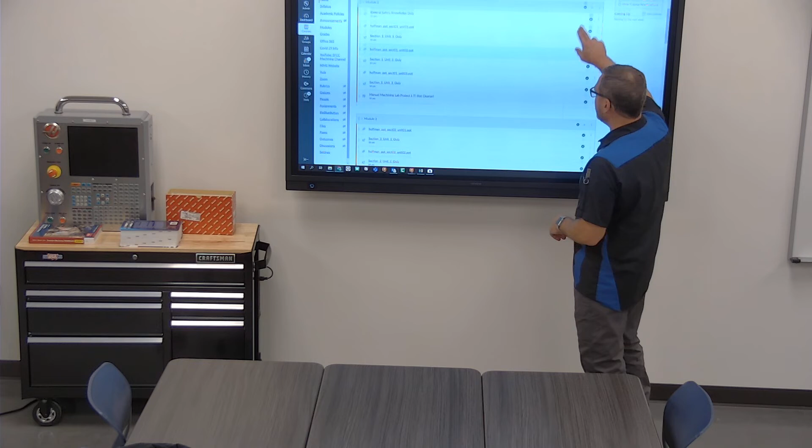This is week 6, or module 6. We have a thread info quiz. We're going to do just thread information today. We're going to do Machinery's Handbook and micrometer stuff today. And then we'll look at the measurement, materials, and safety study guide. Then you'll take your test, and I think that I told you.

Another mic quiz? I just took one. Yeah, but it's our primary measuring tool. Yeah, I know. You know what I mean? I hate it too. You hate it because you avoid it. Not on the laptop, like whenever it's on. Yeah, it's sometimes kind of hard to read. You're right. I still barely passed it. I sat there for 2 hours, and it was still like...

What I do sometimes, and you're welcome to do this, especially if you're here, is when you're taking a micrometer quiz, just go get one. And then that way you can set it to the thing, because sometimes it shows the arrow and it's tilted, and you feel like it's not quite straight on, and then you can get a better view of it and be like, okay, so this is definitely what they're saying. So feel free to grab a micrometer and use it to make sure that you're set up and ready to go.

All right, so this is module 6, then next week is just all shop, all week. Then the final week, all projects are due October 13th by 12 p.m., noon. So that's a Thursday, and it'll be the same week, I believe, that you take, I can't remember what day I told you that your NIMS quiz would be. 12th, okay. So whatever day that is, and I'll put that out. 6 right here, right? Yeah. We got next week and the week after.

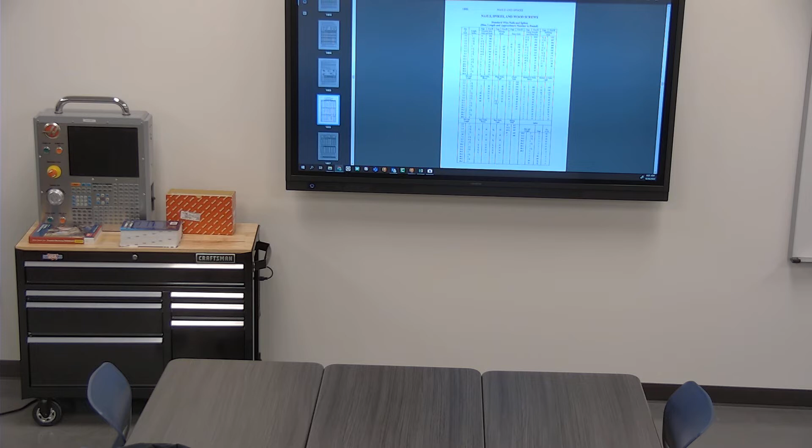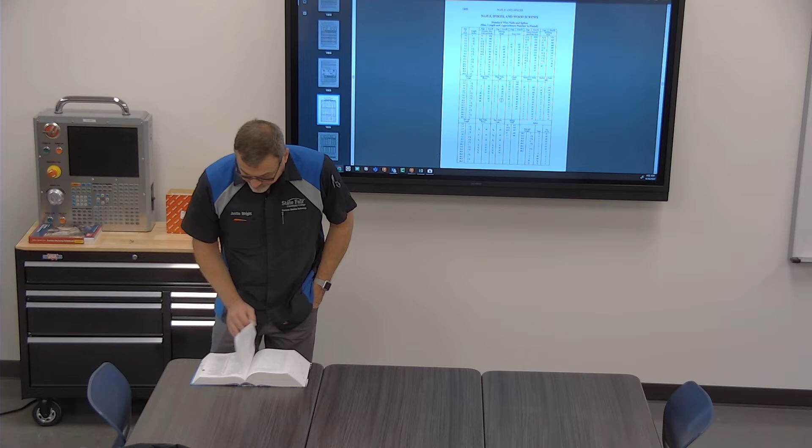What page is it on? 1855. But for some reason, the computer version is not on 1855. Oh, man. That's completely different from what the computer says. So if you look through the book itself, this is just the tiniest part. It's got every single thing that you could possibly look for in thread information. So at the 1854, 1855 pages, you have screw thread systems.

Then you have the unified screw thread systems, calculating thread dimensions, then the metric thread system. Acme threads are a standard or imperial thread, just a little more square. Buttress thread is a different shape of thread. Whitworth thread is a 55-degree thread. Pipe threads are sometimes tapered, not always. And then you have other threads, sometimes what we would call bastard threads, oddball-sized threads or something very unique. Then on 56 you have measuring screw threads. There are several different ways of measuring screw threads. Tapping, thread grinding, thread rolling, thread milling.

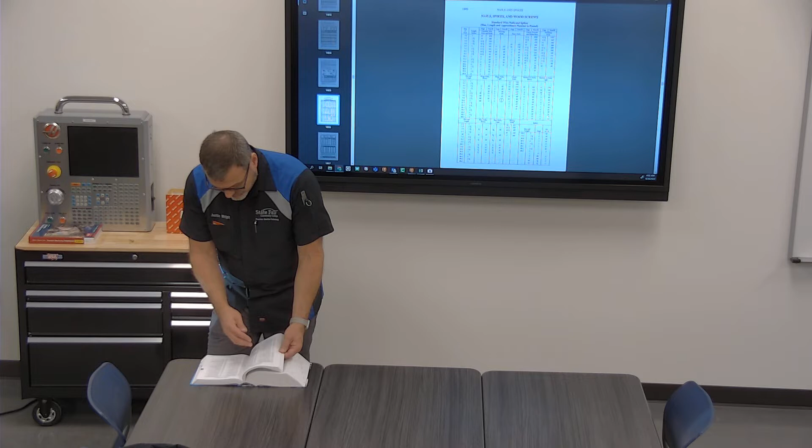Several ways to make a thread itself. So much so that you get all the way to 2100 and some change of thread. So there's like a half an inch of just thread information, okay? So when we're looking at a thread,

so no one's saying you need to be able to memorize every single thing in here. But what we're saying is you need to be able to locate information. I mean, that's how anything is. No one thinks that you're going to memorize how to do everything. The book can be a little daunting. I mean, there's a lot of information there.

But in my Machinery's Handbook, you can tell where I spend my time because the pages are really dirty there. I turned a lot of threads, so I spent a lot of time in the threading section. If you do a lot of bearing work, or a lot of press fit type work, you're going to spend a lot of time in there. So I don't think there's anybody who knows the pages cover to cover. But I think that everybody knows the sections that they work in the best.

And so today, if you can get the concepts of threading and how to read the charts, it's just really going to make the other parts flow together pretty good. So let's just take a standard 1/2-13 thread. Okay, so really simple thread, 1/2-13 UNC 2A. So I want to blur a couple of different pieces of information together as far as threading information, Machinery's Handbook stuff, and then NIMS things.

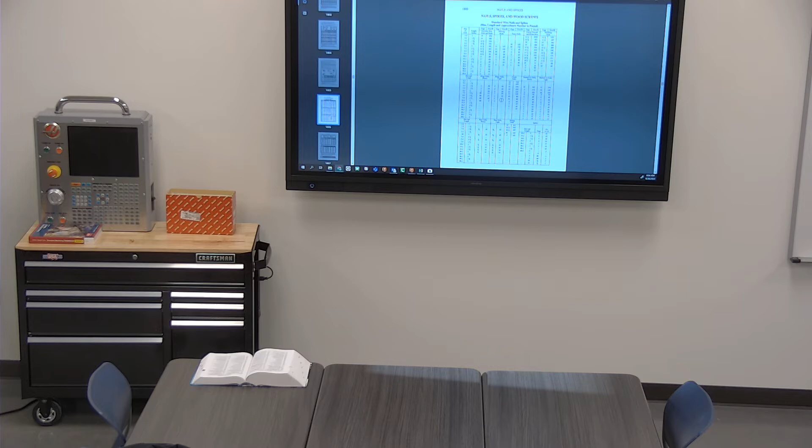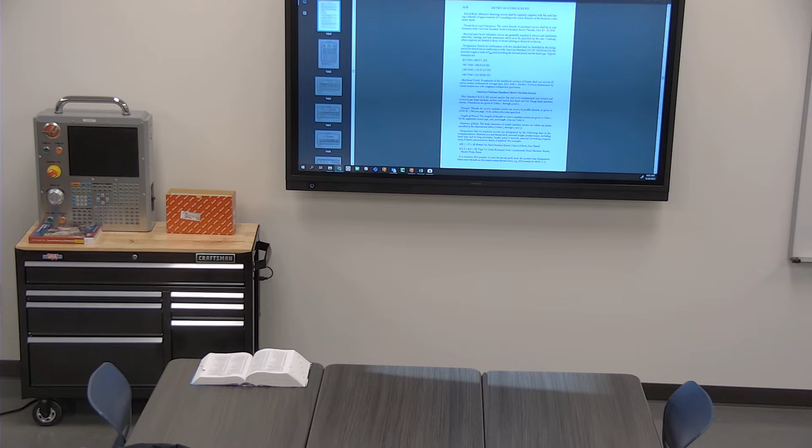So all of that stuff, whoop, stand by. Here we go. Get back over here to the camera.

Actually, I'm going to do this internal, external. Take a picture of this. Wait till I get done. Yeah, just remind me before. And it's recording, so you can always go back to it too. Okay. This is unified.

So could somebody theoretically go to your YouTube channel and teach themselves machining? I think they could. The theory part of it. Yeah. Basics of it? Yeah, so we had the scouts in this weekend. We didn't do machining with them, but we did robots and automation with them all day Saturday, and it was really cool. They were the first students to get to use our Universal Robots. Anytime I was not here last week, I was running over there putting those things together, and me and another guy were working to get it ready for Saturday. We had a great group of about a dozen kids who learned how to move these robots, how to program them, how to manipulate them.

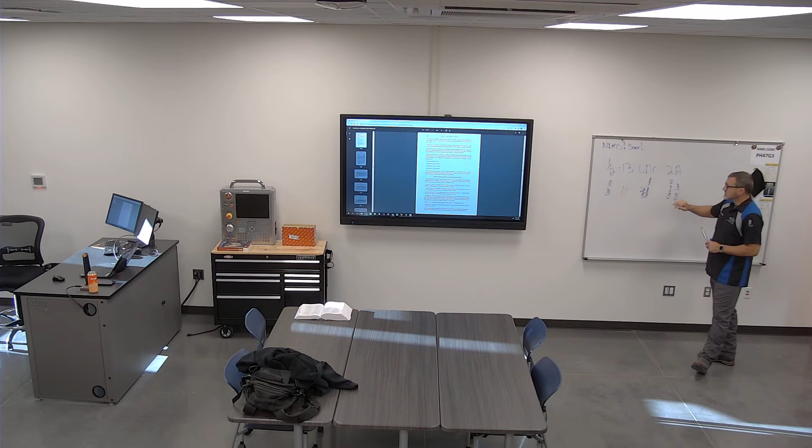If we tapped the hole, like you guys have already done some tapping, that's a B. So it's either A or B. External threads are A, internal threads are B. Class of fit we're going to look at in just a moment. Unified National Coarse, Unified National Fine, Unified National Extra Fine. Those are kind of our classifications right now. And there's a half-12, a half-13, a half-20, probably a half-28. Those are kind of your thread selections.

You want standardized threads because you don't want the five of us in here all making half-whatever thread we want, right? So Steven's making half-28s, and I'm making nuts that are half-14s. We go to put them together, and I'm like, dude, you got too many threads on your thing, and he's going, you don't have enough threads on there. Yeah, just bear down on it. That's why we have this.

Standardization. That's what early machinists used to do: they would make the bolt and the nut, no big deal. Everything went together fine, until you needed a new bolt or nut. So somebody built standardization into it, which makes life so much easier. Does it though? It totally does. Think about it like this.

You were telling me about some lug nut problems you had one day. Imagine you strip 4 of the 5 lug nuts. You're not getting home like that. You can get home without one lug nut, no big deal. But you're gonna need to go to O'Reilly's and get more lug nuts, right? And you don't want to go, I need 4 lug nuts, and they go, what size? And you're like, standard lug nuts. And they're like, I'm gonna need your lug nut stud and your lug nut to make new ones.

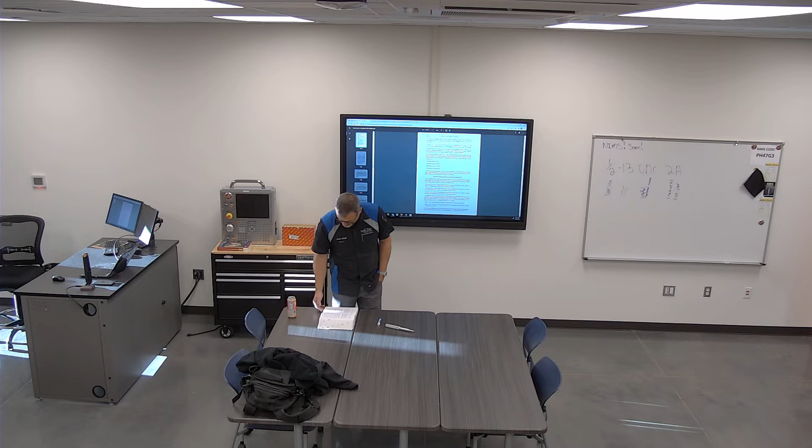Okay, so here's what I want you to do. Get to your pages around the 1880s section. Yeah, 1880, and I want you to try to find the half 13 thread. Might be a little before that. I'm actually in about the 1870s now. Dang, man. A lot of information on there. I'll give you a tip that will make life really good for you: your scale can be used for all kinds of things. It is like a Swiss Army knife. And if you will lay it on, let me get to the page in the book.

I found a half 16. Oh, okay. That's not the one. Are we trying to find half 13? Half 13. Half 10, half 12, and then I found a half 13 UNC 2A, 1A. It's UNC 1A, I think. Yeah, I found it. It's on page 1873. So this section here contains threads, all of our real common threads, big or small. The computer's hard to find it. 1873, in the book. Yeah, just use the book. You'll have the book, don't forget it.

Oh, I can't bring this. Can you buy these online? Same thing, man. How much do you think they cost? About $100. Dang. No, I don't think I need one. Why? It's just paper. That is true. It is just paper. A lot of it, though. I just really want to go get a caliper and see how thin this piece of paper is. You can do that. You can go do whatever you want.

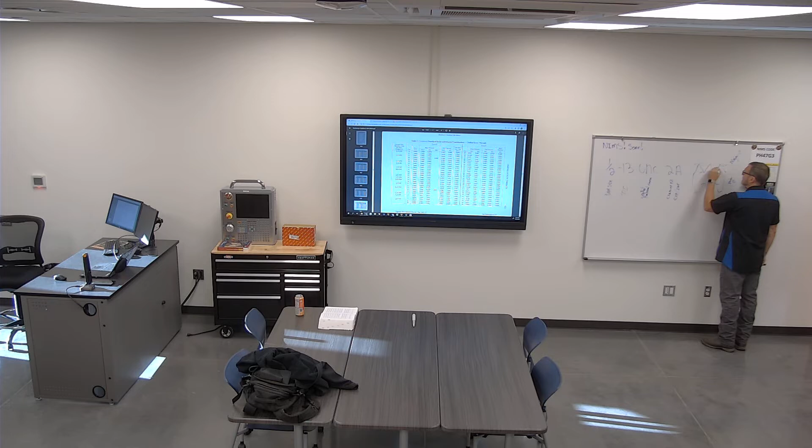So like on your flange nuts, if you were to Dykem that up and screw it on, it should scrape off some of the Dykem, but it shouldn't hit it off the very top and the very bottom. And so you build yourself in there a little bit of leeway to work. The areas that you're going to have major contact on is this area right here, and that area right there, so the midpoints of the thread is where you get most engagement. That area is called the pitch diameter.

But not to be confused with pitch, which is also here. Yeah, high point to high point, low point to low point, midpoint to midpoint, so two even points. So they designed threads that way for it to not strip as easy, I'm guessing. Exactly. Well, it goes lower down into it, not the top. So the idea is that everything has built in some tolerance, right?

So if you work in the food industry, the quarter pounder hamburger has some tolerance to it, right? Even though it's pre-cooked weight, it still has some tolerance to it. A building, construction, everything has some tolerance to it. Your coffee that you're drinking today, they say approximately 2 ounces of this, approximately 4 ounces of this, approximately half a cup of ice. There's tolerance built into it. You can have one every day for a week, and it isn't exactly what you had yesterday, but it's pretty darn close, right? Our tolerances are closer than the frap. But everything in life has a tolerance to it.

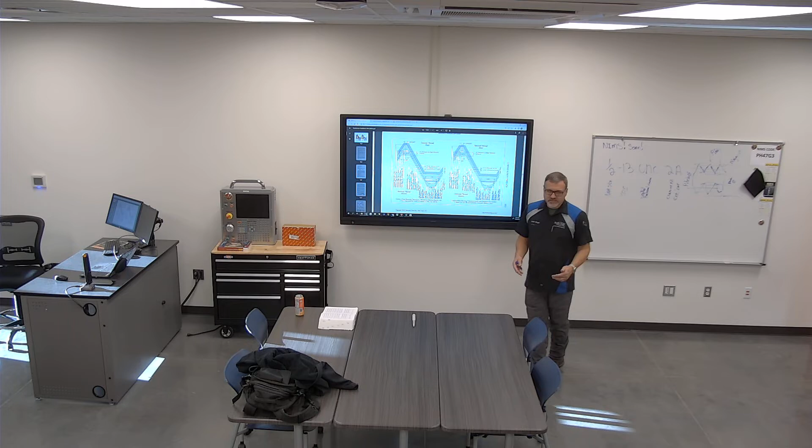Yeah. And so here's your rough idea of what your thread looks like. And honestly, in most of these things, what you're looking for is major diameter, minor diameter, pitch diameter, and then kind of just the feel of the fit. So all of those things kind of play into it. But when you're creating the thread, typically you're not paying attention to every single one of these pieces. But you can see, when I created my thread here, and then I have my other thread here, there's a gap between those, right? And obviously those are small areas, sometimes just a couple thousandths.

Okay, so we've got our 1/2-13 thread here. It holds quite a bit of weight, right? It's a pretty strong bolt. So if I need a bolt that's stronger or can hold more weight, not shear, but it can hold more weight on it, do I want more threads or less threads? More. Okay, but when I make more threads, my threads get shorter, don't they? Bigger, long, bulkier threads. Less thread. How about less threads, deeper threads? Yeah, less but deeper threads. Okay, you say more threads, shorter threads? Okay. More threads equals more engagement equals more holding ability.

So typically when we start to go down in thread pitch or coarser in the thread, it's because we have less gripping onto it, but we want to thread it on faster.

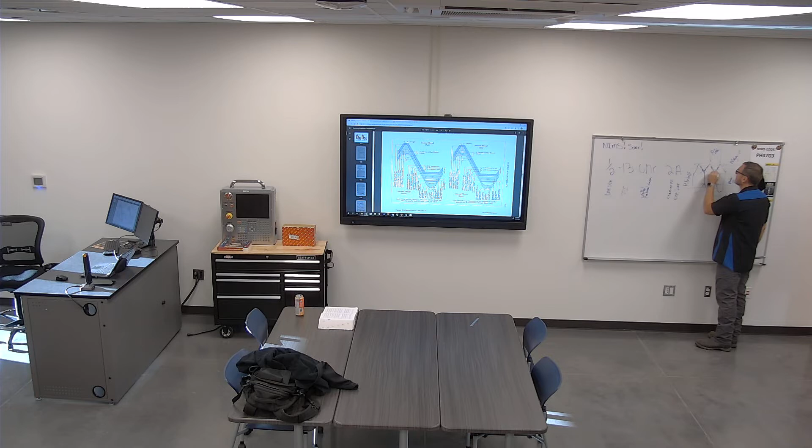So if you were to hang that Ram truck from the bolt, and you took a sledgehammer and hit it across there, it would just shear off and the truck would fall. Because when you make these things, you're making shear points, right? So a lot of times in our threads, we'll put little valleys down in there. That's what I was looking at on the one that's on the screen right now. Yep. So a normal 60-degree thread has some valley in the bottom of it to help build some strength back.

But that's not the purpose of the bolt. The purpose of the bolt is not to have insane shear pressure. It's to fasten two things together, right? And so then the nut or the hammerhead or whatever, it goes down over it. Shear no longer becomes an issue. So how do they build bolts that are meant to take severe vibration and stuff like that? Fine thread. Calipers and stuff like that, once they're connected to the other pieces, then it's like they become solid.

Right, because let's use brake calipers. So you've got those socketed cap screws that you screw in there. The head takes all the pressure, right? And so it actually never gets to the point where it's hitting against the thread, or this large area is what pushes against the thread. Never is a chisel coming through there and smacking it, right? So yeah, if I took a chisel to this, I could knock that thing off there. But that's not the point of it. It's to fasten things together. So you got to know what it is that you're doing.

But you do need to know that if there is something sticking out like this, it becomes the weak point, right? Let's go back to your lug nut story. If I'm out and I've got 4 lug nuts off, and I'm trying to get the last one off, and I'm like, man, I'm just going to sledgehammer this thing off. I'm going to hit every lug nut and break it off on accident because I know me. I will miss every time. And I will be like, why'd those things break? Well, because somebody created all these V break points in there. And now I got 4 broken off lug studs.

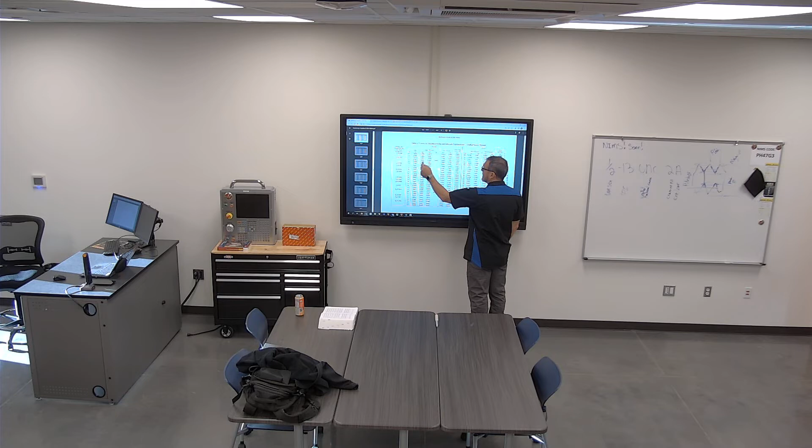Okay, so here's our thread chart back again. So we have our half-13, our major diameter is .498 to .482 for a 1A. It is .4985 to .4876 for a 2A. And then .500 to .489 for a class 3. Which one's got the most amount of tolerance to it? 1, 2, or 3? And then which one has the least amount of tolerance to it?

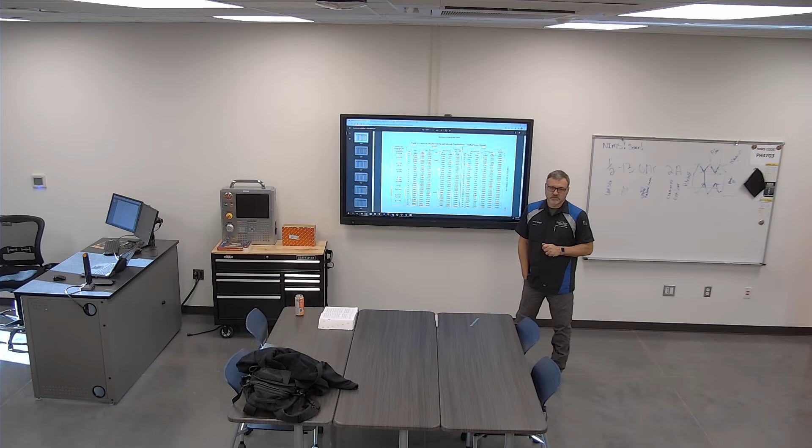So, quick way to figure it out, just do the math. Take these two numbers, subtract from each other. What's the difference? Do it for all three of them, 1, 2, and 3. Tell me which one has the most tolerance. I'm just gonna write it here. 1, 2, and 3 for class of fit.

Dang wind blew my pages around. I'm on a whole different page now. Moving over from that.

And I went to Casey's for the specific purpose of getting cash back so I could go to a stupid volleyball game today. Get in there and go pay for my stuff, and I'm like, no cash back. Hate you all. You had it that way for a while, didn't it? I think that's how they all are. What? Yeah, I think everything around Sedalia is just not doing cash back.

Okay, what's class of fit, or what's the tolerance for, did you have? I figured out by just looking at it. 3 is the highest for sure. 3 has the most tolerance, I'm thinking, or the least amount of tolerance? By how much? Do some math, do the hard work. I'm gonna go grab a couple thread gauges. 109. Stand by. 109 sounds like a lot.

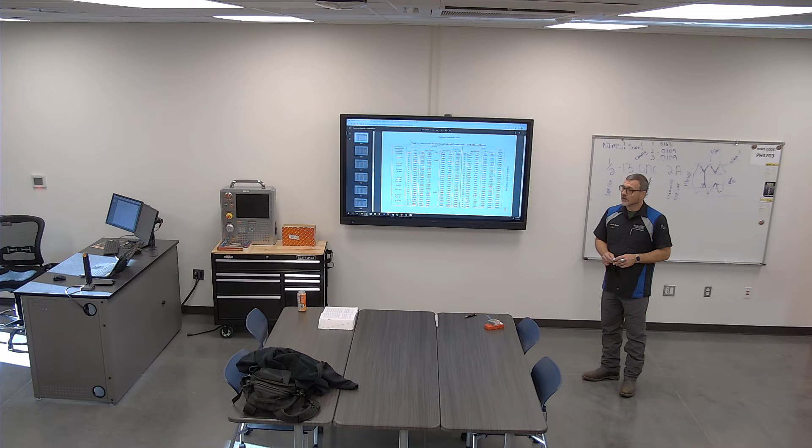Drugs. Yeah, I think all of us think that right now. Got a whole thing of oxycodone. It looks like it. They're mints. I got it from Golden Valley Memorial Healthcare. They're gonna give me some drugs, probably. If anybody's gonna have it, it's gonna be them. That's from the job fair. Bunch of mints. I got one of those straws, too. He's like, yep, every college student needs a straw. Why does every college student need a straw? So they can drink a drink, or snort something. I was there when he said it. What are you trying to imply here? Was it Nucor? Nucor gave it to us.

Yeah, it's odd. Okay, so as far as our tightest tolerance, if I said, what's a tighter tolerance, a class 1 or a class 3 thread? Class 1. Oh, 3. 3. So it goes from loosest to tightest, right?

Which women came with a manual like this? What? Which women came with a manual like this? We're not gonna go there? I'm not. I am happily married.

Which one has the best tolerance? So 2 is kind of your midway, so that's what we have here. We have external and we have 2 for class of fit. All we've done is just that tail end 2. But some of the other ones are pretty obvious, right? Threads per inch and nominal size and stuff.

I bet if I showed that, it looks like an equation, I think my mom would try solving it, like math. I would put it in front of her and be like, hey, can you help me out with this?

I'll be right back. And then just don't come back. And she'd be like, I'm not sure what this is. You know, be like, this is what we do all day. Surely you can figure it out.

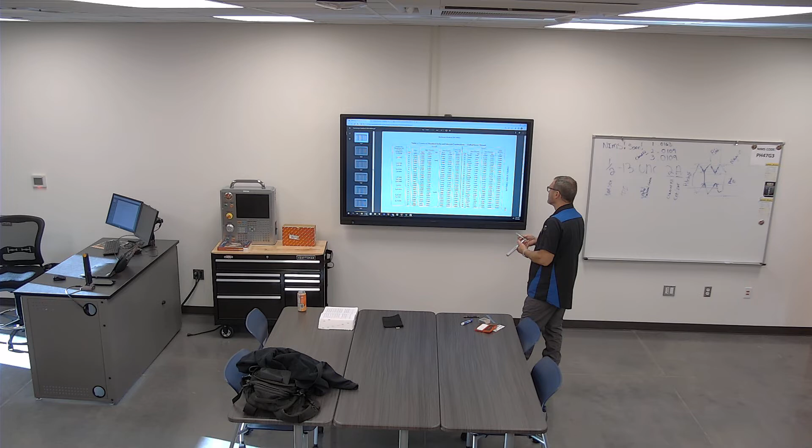Yeah, appreciate that. Hit the rewind on the recording real quick. Right. We need to re-record that part. Yeah, we're gonna erase. What? Dang. Like the, what's that Bugs Bunny meme? Oh my. Oh yeah, the Meat Canyon one. That is hilarious. It stinks. Am I wrong? Am I wrong, or what are we looking at?

Well, it is a little bit off, but it'll ride. You could put a nut on there, I'm sure. Well, the nut fits perfectly. Oh, I haven't even tried putting mine on yet. I don't even have the holes drilled through my hammer. You shouldn't. Remember, we're doing all the lathe work, and then we're gonna go down and do the rest. Okay, so that's why I have projects that are just sitting there. Yeah, that's why you're at 40% in the class, because those two are zeros right now. I'm not sure why this is off.

I know they have that aluminum block. Who's the one that made that thread on that one? You know what I'm talking about? Appreciate your throw-you-under-the-bus mentality there, man. Just saying. That was the test dummy right there, is mine. It's probably because I've done more classwork than you. I've done all the classwork already.

Oh, okay, so this is measuring the minor diameter, sorry. Except for this week's, have you done the micrometer quiz? We're gonna have to do the micrometer quiz. Okay. So here you have your thread micrometer, and then on this it shows, well, what thread does it have in it? Actually, that's just part of the instructions in the book. Oh yeah, here it is, what it does: 10 threads per inch to 13 threads per inch. So if you have a half-20, you can't use this micrometer for it.

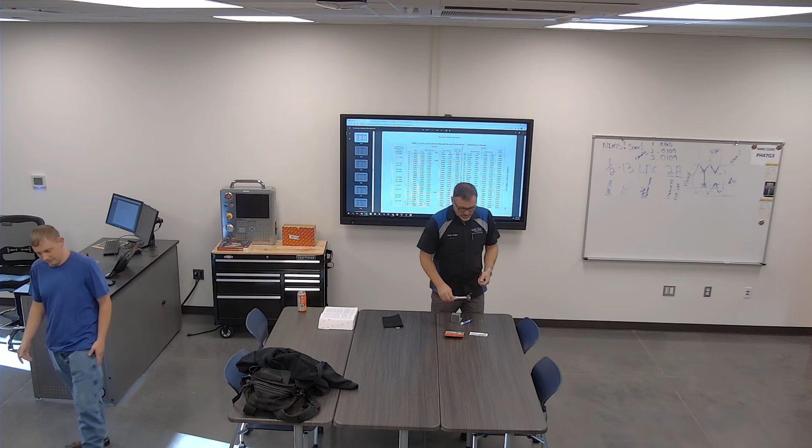So, let me try to get some of this wax off of here. It's got a protective wax on it. Okay, so let's just assume that this is a tapped hole. And so I check it with my gauge. My go gauge should go down into it. My no-go gauge should not even start in it. You can take a look at the threads on the no-go side, see how they don't even come to a point?

So that's how we would check a thread milled hole or a tapped hole, thread formed hole, some type of internal threads. That's how we want to check it, because we can't micrometer check it, right? I mean, you could telescope gauge it, you could gauge pin it, but you don't really have a chance to check it in another way.

How about those, they're meant for gauging screw stuff? They're like really thin pieces of metal. Feeler gauge? Thread wires? I don't know what they're called, I have to ask Ed, we did a whole thing over them, they were super thin, flat pieces of metal that fold out. Yeah, feeler gauges. Then they are feeler gauges.

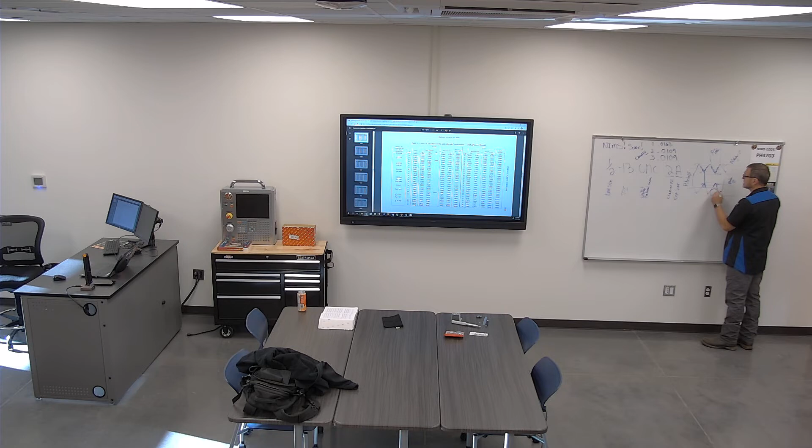So we also have thread wires that we can use. The thread wires take a little more work to do. We used to use them a lot, but we don't use them that much anymore. It takes 3 wires, and you put these 3 wires in, and then you micrometer over those 3 wires, trying to hold them all in there together. And then there's a constant, a little bit of math formula that you use to figure out where you're at.

It does take a little more time, but the math is really simple. It's like the major diameter minus the constant to figure out what the pitch diameter is.

It's just a quick formula, and what's really good about that is if you don't have the right thread gauge, and say you're making some oddball bastard thread, 14-inch, 20 threads per inch, right? Well, no one's gonna have a gauge for that, so you can set up thread wires to make sure that it's right. Another way, we'll look at it in a minute, is to take it to the optical comparator, and you can see some of those things there too.

We'll use it here in a minute. Okay. Is that more for later on, like CNC and stuff? Is that why we haven't used it? So, the optical comparator happens lots of times and in lots of places. It's just another method of checking things. It's one you'll go to sometimes when it's appropriate, other times when it's not.

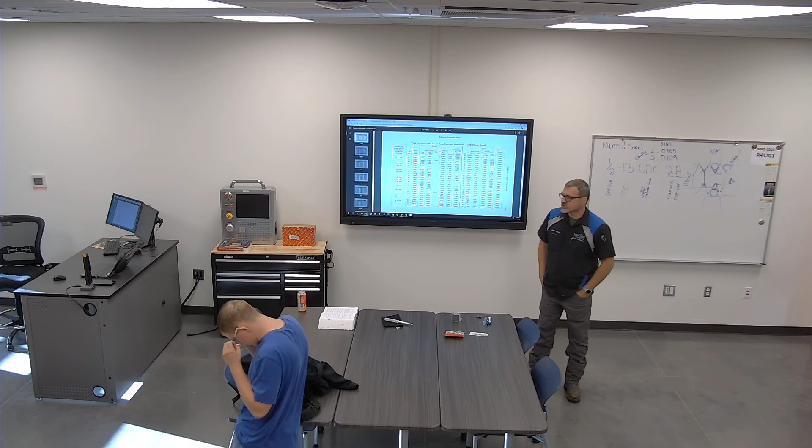Okay, so that's some of our thread information. And then a couple of different ways. There's a lot more left. Oh, gosh, there's just so much stuff, right? There's just so many different things. Okay. Writing it seems like it was a lot.

What? Oh, so this morning I came in, and we had to work Saturday because we had to do a Boy Scout group. And so I came in this morning, got here about 6, and I was like, I've got the live tool lathe about half touched off. I'm gonna go ahead and get the last of it touched off and at least start running things. No power. See anything in the shop? Nothing in the shop. We didn't get power till like 7 o'clock. And I was like, you guys are freaking killing me, man.

Nope, something got tripped over the weekend. So must have been late Saturday night or Sunday. Could have been anything, you know. And, yeah, so I turned it on. That's all I've done today. I've got about half the tools set up on it, but that's about it. I've got a program written for it, but... Are you gonna make the wheels on it? That is the goal. That may or may not happen.

We've got the Sedalia Showcase on Wednesday. The plan was that we would be running it. What time is that? It's like 11 to 1. I'll help you. I'm here till 2 today. Yeah, I'll probably need some people to kind of stage up some stuff. We'll have the governor here and some people, but yeah, we want students in here doing some stuff. So, okay. Did you need me? Okay.